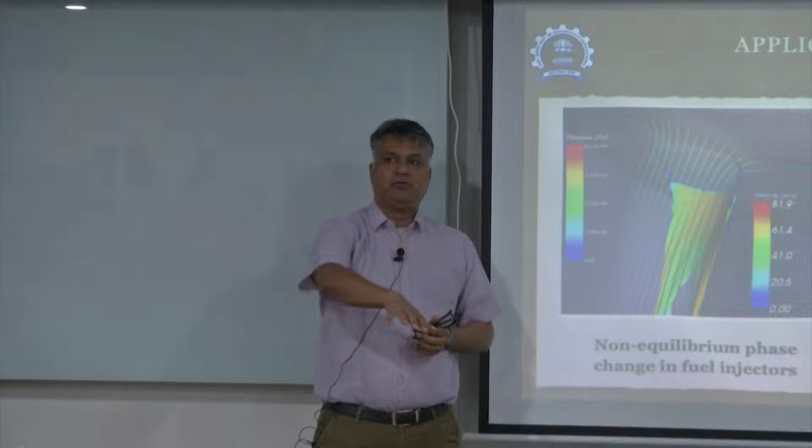The second thing is, how do we model this fuel injection process? Because the pressures are going so low, you're going to start seeing vaporization within the fuel injector itself. Typically in normal fuel injectors, you have full liquid fuel and vaporization takes place only inside the combustion chamber. But now, because the back pressure is so low, you'll probably see vaporization within the nozzle itself. So how do you design this nozzle? How do I understand the physics of it? And to add to the challenge, this is not a single species liquid. Petrol contains several components.

It has octane, it has lighter fractions, heavier fractions. It's generally a mix of many things, so it's essentially a multi-component hydrocarbon.

Then the second problem is, how long does this injection take place? A typical car, if idling, runs at about 800 RPM. If driving regularly with normal load, not climbing a hill, it's about 1200 to 1500 RPM, depending on how the engine is configured. Your injection time is a small fraction of that cycle. 1500 RPM typically means a 4-stroke cycle, so divide by 2, and you can figure out how much time one full cycle takes. Injection is a small fraction of that—really small, just a few milliseconds, or almost a few tens of microseconds, where the injection actually takes place.

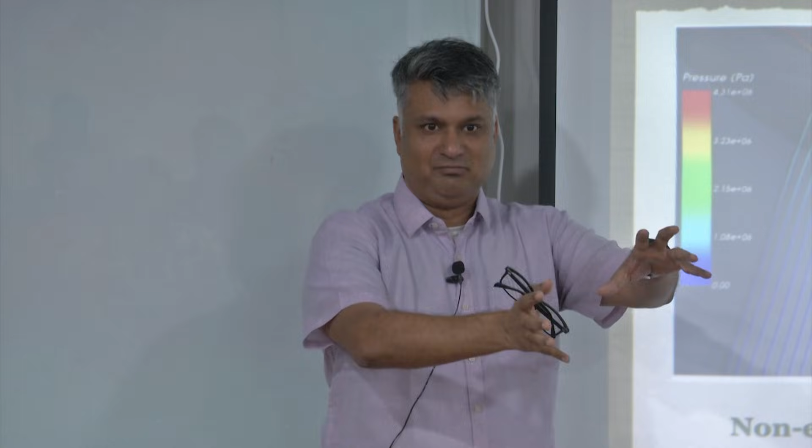In that time, as the fuel vaporizes, what we think as engineers is that the moment a thermodynamic state is reached—pressure, temperature, all other properties—will reach there immediately. But that's equilibrium thermodynamics. In that short period of time, there's no equilibrium. So there's some finite lag for which this needs to come in, and now you have to model the phase change with thermodynamic non-equilibrium.

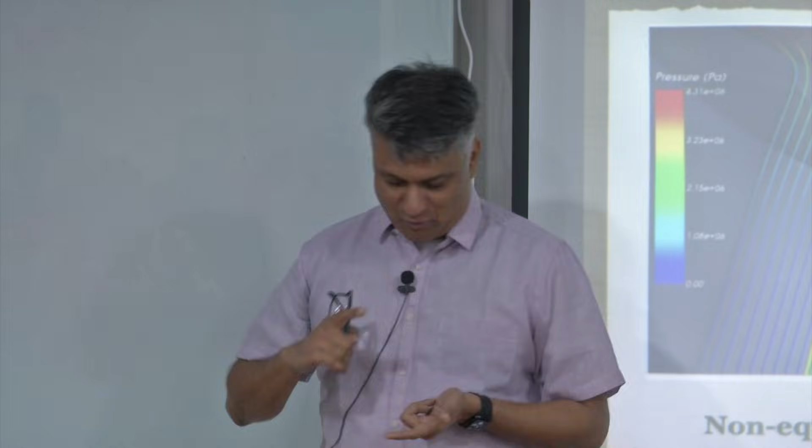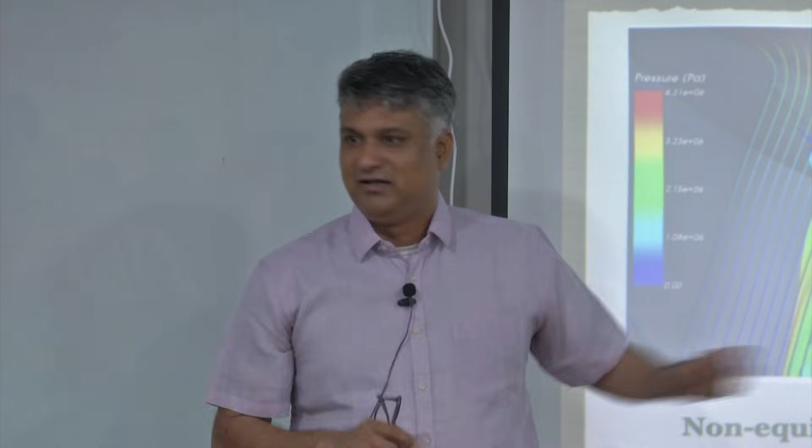Now think about the complexity of the physics in it. I have to model multiple species or a surrogate fuel, model the non-equilibrium, and then take care of real world injector geometries. I can't just do this in a straight tube and say the problem is done—this is the real world. This, by the way, is an actual fuel injector from Bosch, which goes into an operational GM engine.

So think about the complexity of the problem, and you don't have 15 years to develop this. If I had taken 15 years to write code from scratch to model this, by then EVs would have come and this would be gone in history. You have to do this cycle.

What really helped us is OpenFOAM. OpenFOAM was in its early days—in fact it was called FOAM till 2004, when they open sourced it. There was a small community, primarily out of Imperial College: Henry Weller, Hrvoje Jasak, and others. Then Hrvoje got a faculty position at Zagreb and moved there, working with a few people. We were among the few, I was a student in the United States at that time, who started working with them. We decided to try this modular approach, to see if we could develop something quickly enough and test it for real world engineering problems.

I was fortunate, things worked. With research, nothing is guaranteed, but things worked. We were able to develop this quickly enough, and within a period of about 3.5 to 4 years, we actually gave a validated code for engineering calculations to General Motors.

So much so that in their production cars from 2008 onwards, they used this model to simulate fuel injectors, designing GDI type engines. Similarly, the same model was used to model non-equilibrium flows for jet fuel, Jet A and JP8, used for Pratt & Whitney's engines by United Technologies. The modularity of this code really helped us accelerate a lot of complex industrial calculations we needed to do.

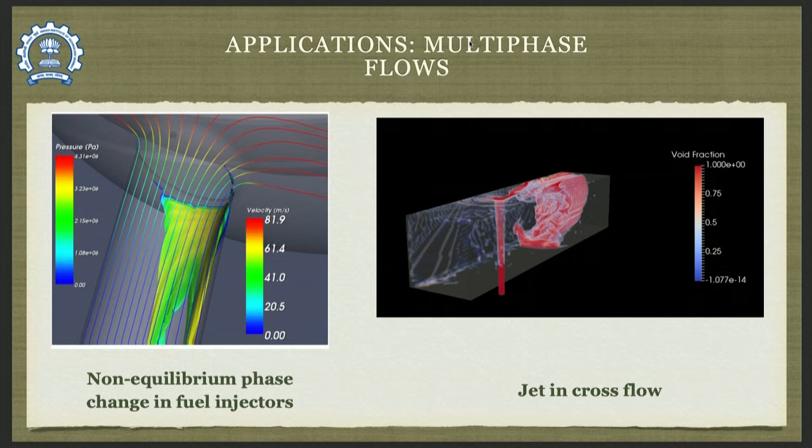And that's the story I'm going to tell you today—what sort of different problems we've attacked in the last couple of decades. I can't talk about all of it because some is under IP and I can't discuss it openly. Some is ongoing. Some were failures too—I'm not saying everything is hunky dory, you can't have everything succeed all the time.

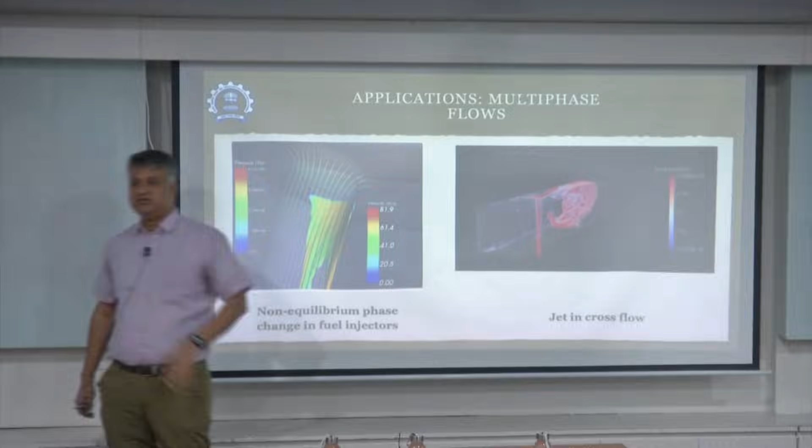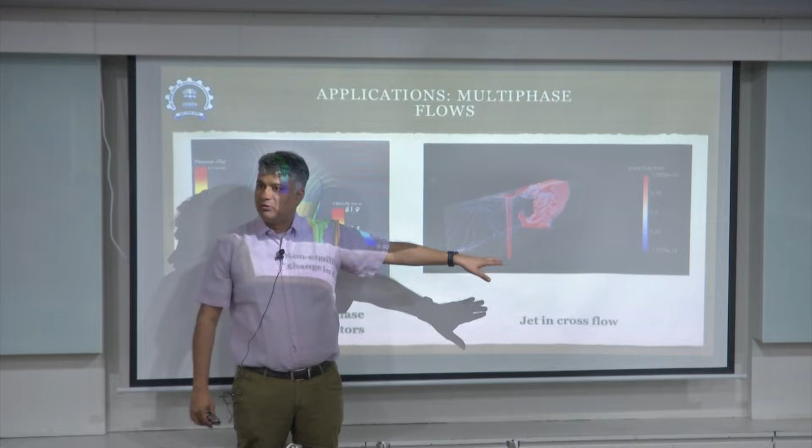So this was one of the first problems we worked on. Then as I got to IIT Bombay, we started looking at fundamentals of jets and cross flows. This was important for us, looking at the fundamental dynamics of how jets break up in cross flow—a complete multi-phase flow problem with RANS type closures for turbulence. We wanted to study the breakup characteristics of this jet, driven by an industry problem looking at land-based gas turbines and fuel injection in them.

So you're injecting liquid fuel into the combustors of gas turbines. There was a cross flow, and it would break up. We wanted to see how these breakup modes would occur, again to look at fundamental breakup characteristics, then mixing efficiency, and so forth. This is a similar problem to the jet and cross flow problem, where we used a volume of fluid approach, not explicitly tracking each and every phase.

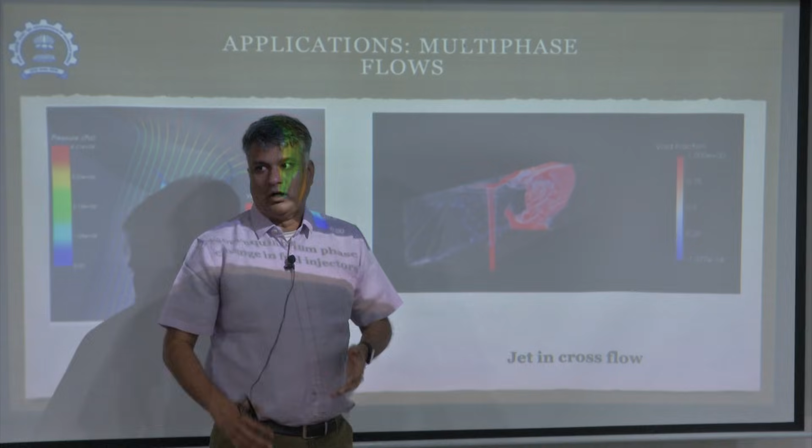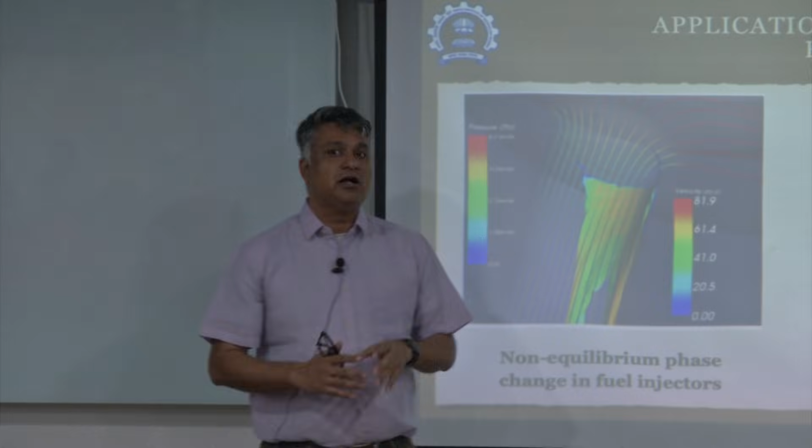Because we were using a volume of fluid approach, we had to resolve a lot of features, and that meant it was computationally very, very expensive for us. So we could only do basic fundamental studies with it and then come up with better correlations in terms of atomization models and breakup models.

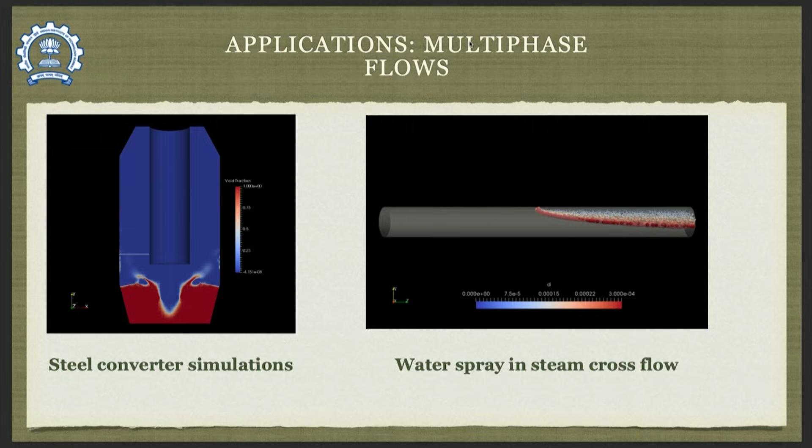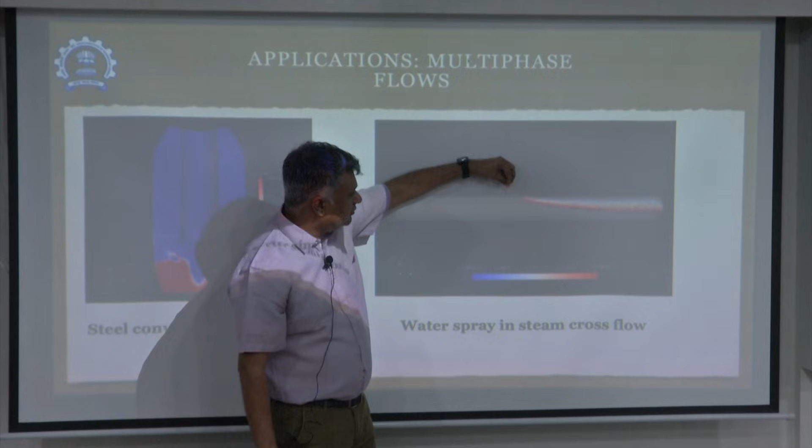The next problem where this helped us was this one. This is basically a Lagrangian-Eulerian type of problem where you have injection of water into a cross flow of superheated steam. The water breaks up into many small droplets and then eventually vaporizes.

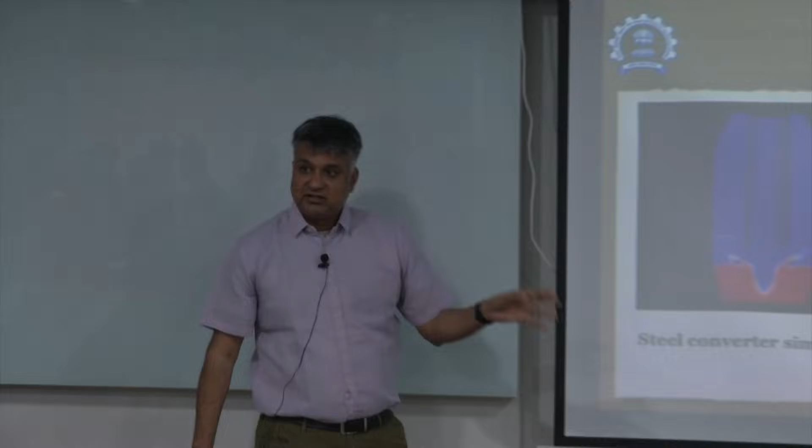Now you will ask, what is the purpose of this? This is used as a control mechanism in thermal power plants. The idea of thermal power plants is that you generate a lot of heat, which is used to produce large amounts of steam. The steam goes and drives a turbine, producing power. But when the superheated steam is produced, one needs to modulate and control its temperature.

The combustion process generates steam at extremely high temperatures. But when the steam actually goes through the system and hits the turbine, you need some sort of control on what temperature the steam is hitting the turbine at. Because if it hits at extremely high temperatures, you will have material destruction of the turbine blades, which are very expensive.

So how do you control high temperature steam? How do I modulate the temperature? The way is that I inject water. Basic thermodynamics kicks in, the first law kicks in. The water vaporizes, takes away energy from the steam, and then you have this delicate balance.

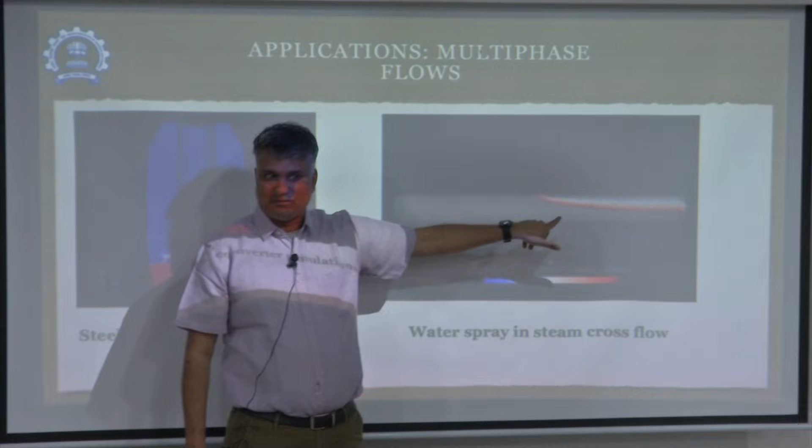But here's the challenge again. I need to understand how the breakup of this water takes place, the atomization of this water takes place, how it vaporizes, and how much the temperature drop is.

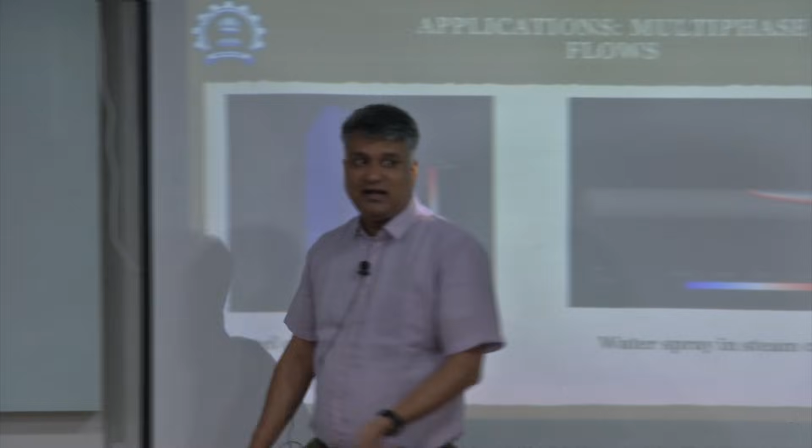And is there any residual water left? Because imagine if I under-inject water, I am not going to cool the steam to the desired temperature. If I over-inject water, I not only waste energy by overcooling the steam, but there is a strong possibility that not all of the water will vaporize.

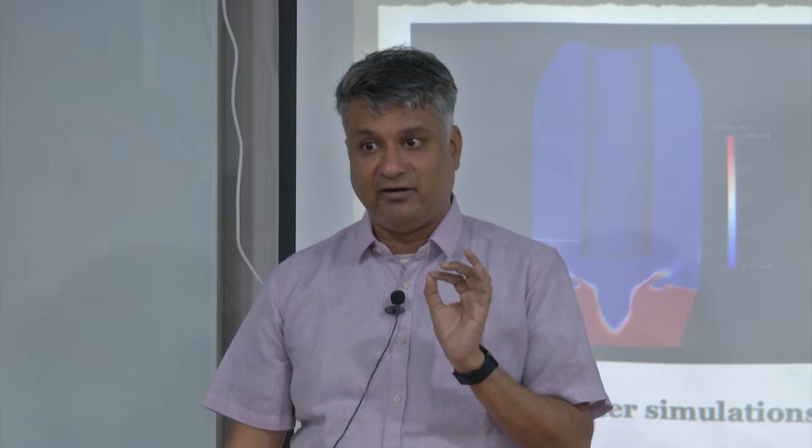You literally have a bullet, because water is almost 1,000 times more dense than steam, and it's going to hit the turbine blade with that much momentum. So you're going to cause further damage. You have to understand this entire process and model it, and this is not easy.

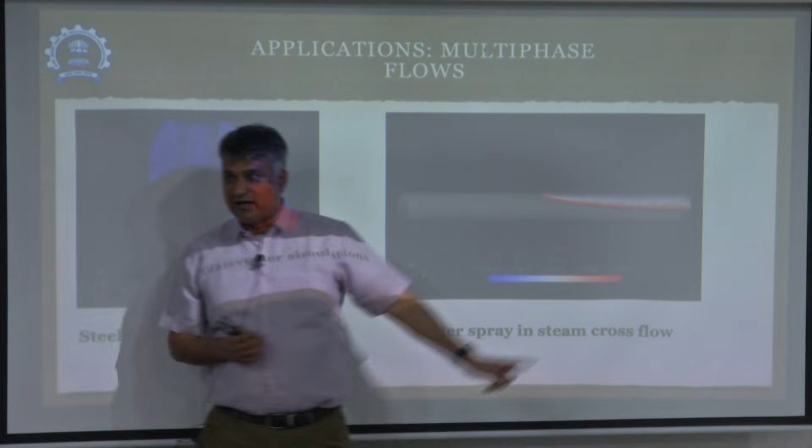Remember, the size of this pipe is about a meter. You go to a large 500, 600 megawatt steam power plant, this pipe is about a meter in diameter, and your droplets are micron size. I cannot fundamentally resolve each and every droplet.

Computationally, forget the supercomputer sitting here, you give me the world's fastest supercomputer, yet it's not a tractable problem. And it's not worthwhile throwing that much energy into the problem, because the energy being produced by the steam power plant is probably not enough to pay for that computation. So how do you solve it?

You solve it using arbitrary Lagrangian Eulerian. You model these droplets as Lagrangian particles, Lagrangian parcels in the cross flow, and put in correlations. I won't go into the math here, but if you want to talk about the math, you can come — there's an entire paper, an entire report about it.

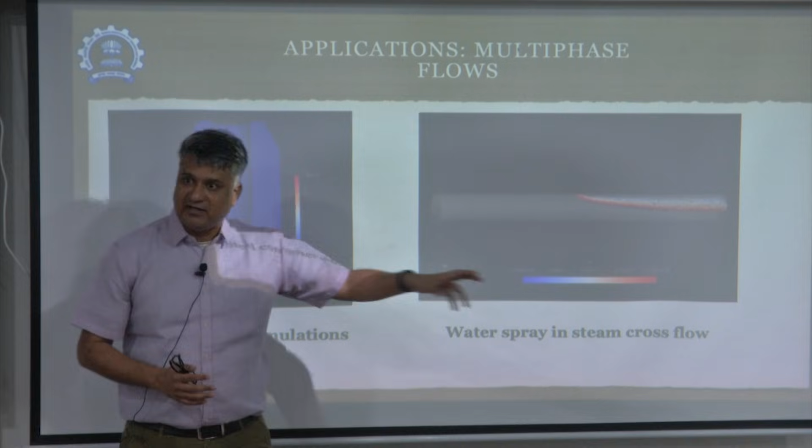But again, we were able to do these calculations within a year. We were able to suggest to the company producing the steam power control valves: here is the prediction from CFD. We validated it against experiments, did some fine tuning, and then said, okay, here are the atomizer design changes you can make to make this mixing more efficient.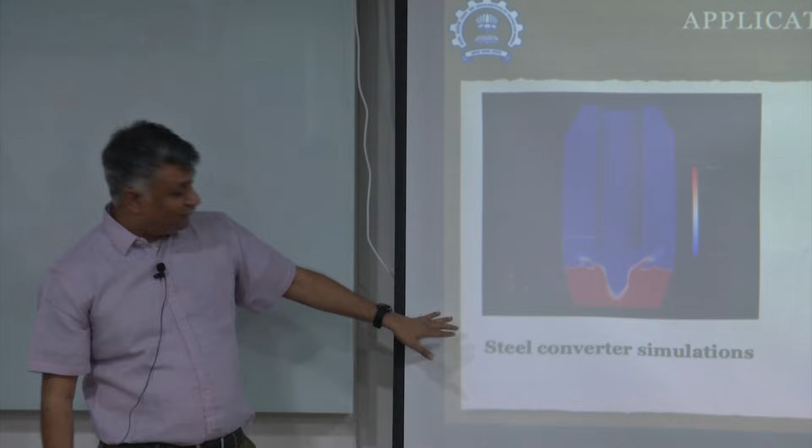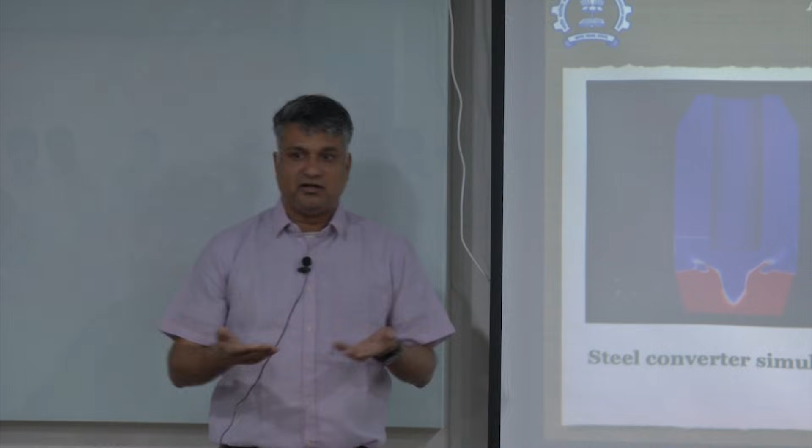This is steel converter simulations, done for a Japanese steel company. A steel converter is basically where you have molten steel and you're hitting it with extremely high velocity compressible air jets. The reason is that you want to agitate the molten steel so that all the slag and impurities come up to the surface and you can take it off.

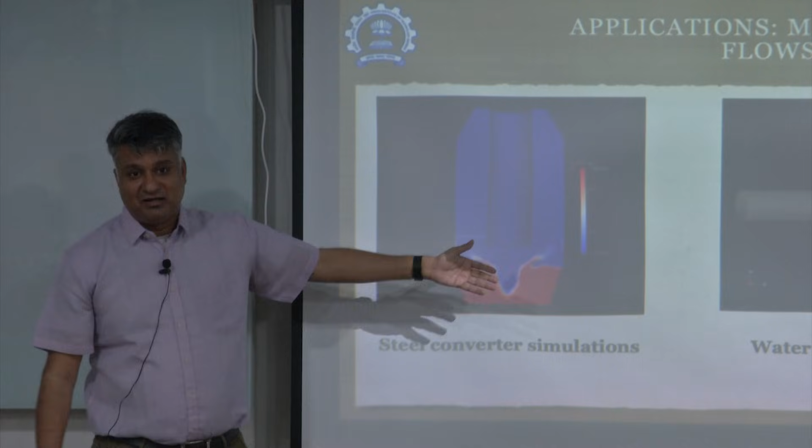Challenge here: molten steel has a 7,000 to 1 density ratio with the compressible air — air is about 1 kg per meter cubed, steel is about 7,000 kg per meter cubed. You have to model this sloshing steel accurately, and figure out how these injectors can be placed optimally so that you have reasonable sloshing, reasonable mixing, and reasonable slag extraction.

Magnetohydrodynamics — this is the test blanket module for the ITER fusion reactor, and you can see the scale of the human being here.

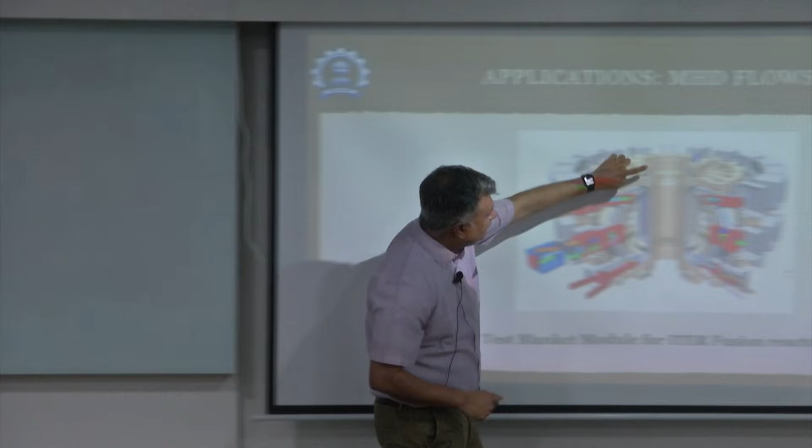So there's a breeder section here. One of the things the fusion reactor needs as fuel is deuterium and tritium. Tritium is not plentifully available. Deuterium and tritium need to be created through a process called TBM, or test blanket module. So what is a test blanket module?

It basically has flowing lead lithium alloy. Lead, one of the heaviest metals known to mankind, and lithium, very, very light, mixed together as a eutectic alloy, is flowing through. It's a magnetohydrodynamic fluid. You're basically having a nuclear reaction which is producing tritium, and a byproduct of that is helium. And there's a possibility of helium ingress in that.

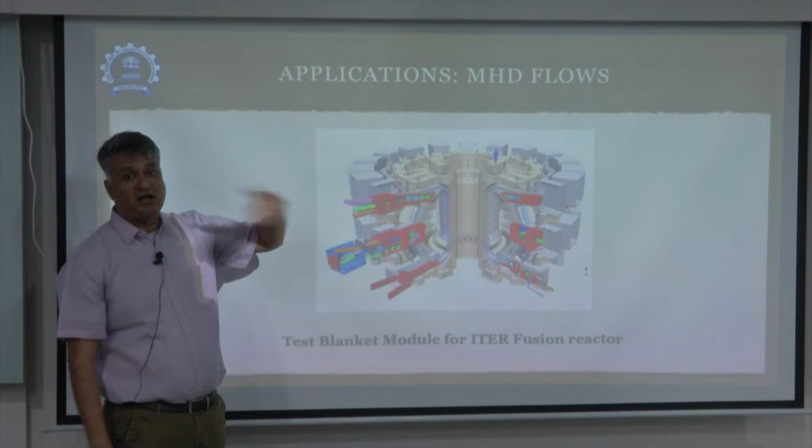So this is being done in a very, very strong magnetic field. We have to model this as a magnetohydrodynamic fluid. So we were trying to understand the physics of the magnetohydrodynamic flow at extremely high Hartmann numbers in this TBM module. Also, again, in OpenFOAM.

Biological flows. So we talked about a lot of industry, now biological flows. When the pandemic hit, there was a lot of CFD being used to study different types of flow dynamics. One doctor came to me and said, can we study the flow characteristics inside the nasal passage? Because one of the mechanisms of the vector was that these pathogens would go through your nasal passage, and some of them would get stuck there, and some would go inside. There are ways to rinse it out, but to understand that process, we had to understand the flow dynamics within this nasal passage.

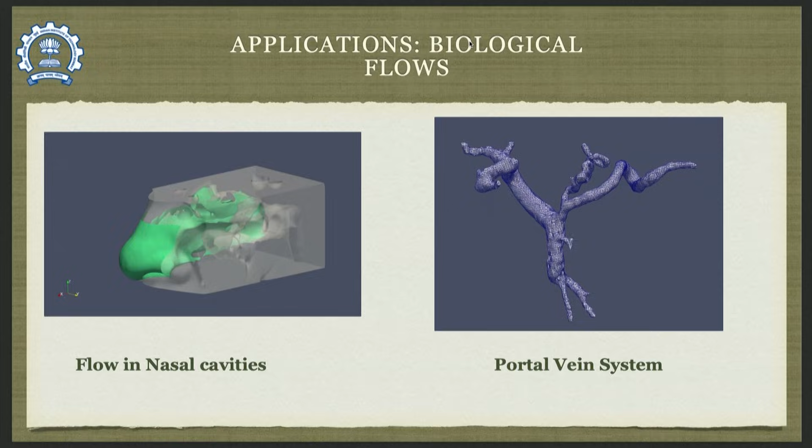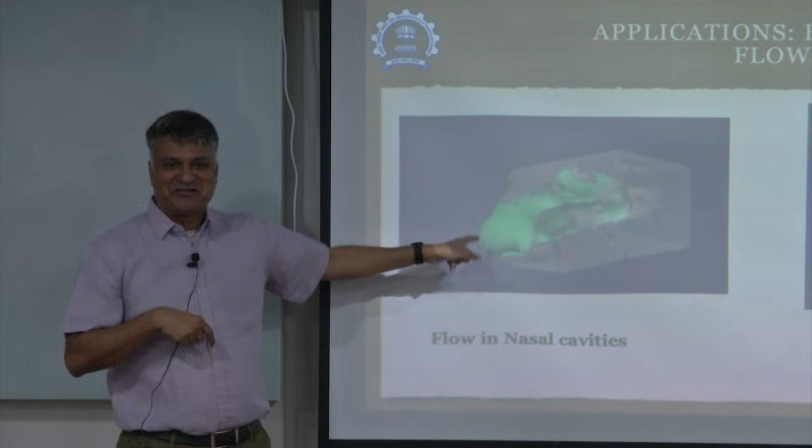So we actually took, if you look very closely, that's my nose. That's actually my nose. I took my MRI, reconstructed the mesh, and put it up there and tried to study the flow dynamics inside it. This project didn't take off too much because the science of rinsing off the pathogens, etc., was not really sound. But the idea was that we wanted to study the fluid mechanics. While it didn't go anywhere, it was a hobby project, but it was fun to do.

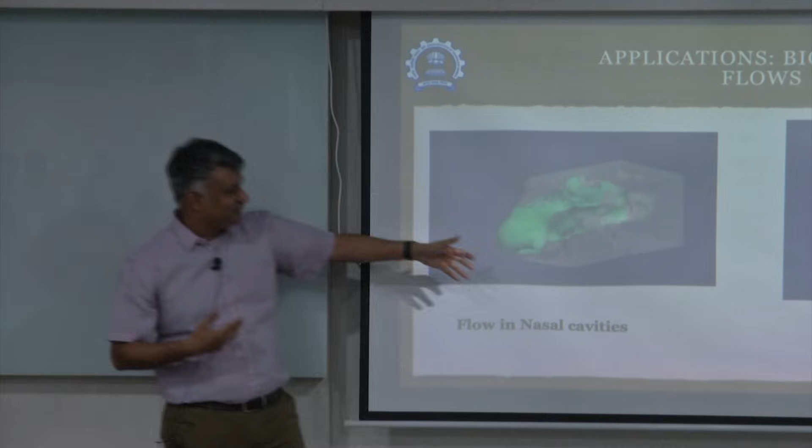The fact was that we were able to take such a complicated geometry. Think about the complicated geometry of the nose, especially my nose, very complicated. We were able to model it all the way up to the back of the esophagus right here. So the green part is the entire cavity, and we were able to model that.

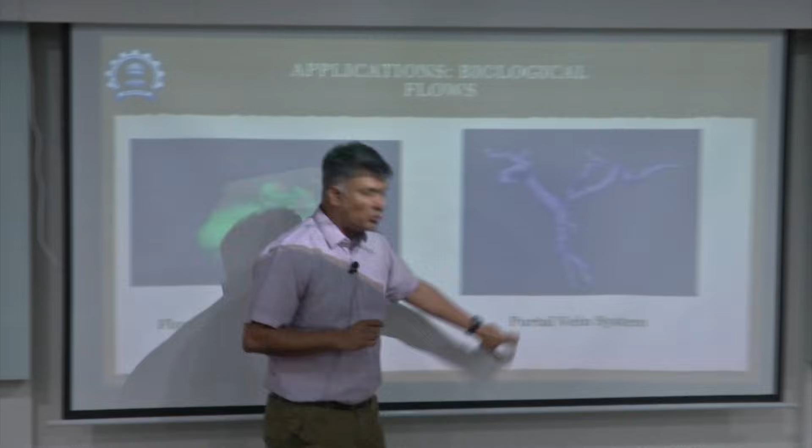This was another interesting project we did with doctors at the KEM hospital in Mumbai. This was trying to look at blood flow, especially in the portal vein system, mostly for patients with liver cirrhosis. Now, the issue with liver cirrhosis is that the portal vein system terminates towards the liver, and there are a bunch of capillaries which then go into the next part of the digestive system.

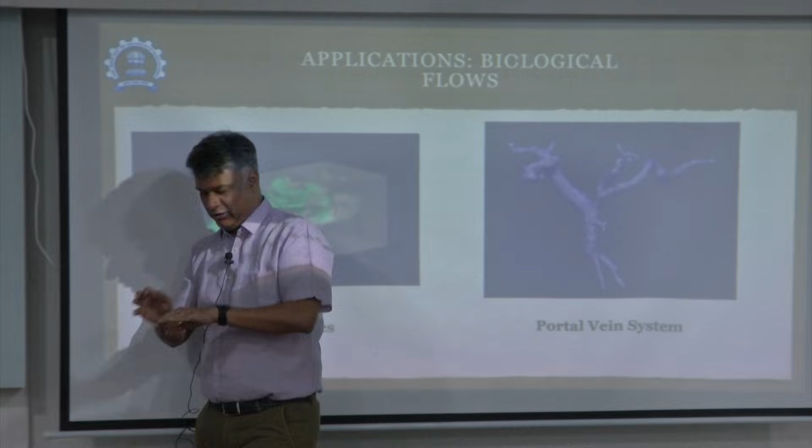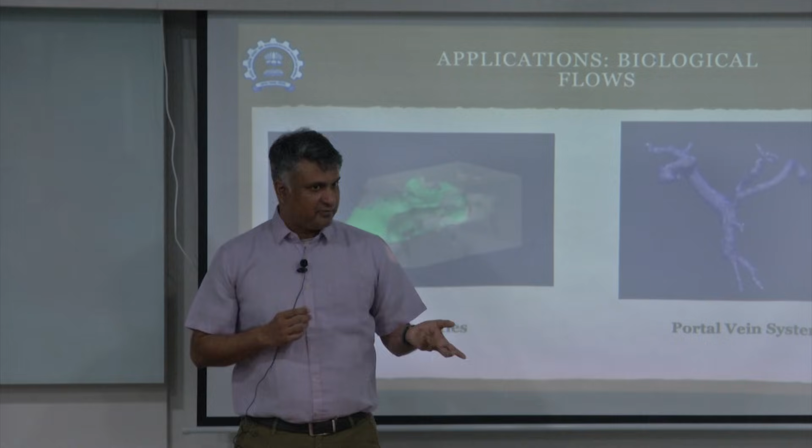Those get completely clogged in patients with cirrhosis. So there are lots and lots of clots, etc. Pressure builds up over here. And once the pressure builds up, some capillaries will burst somewhere, usually in the digestive tract, and the patient bleeds out through the digestive system. That's typically what happens to these patients.

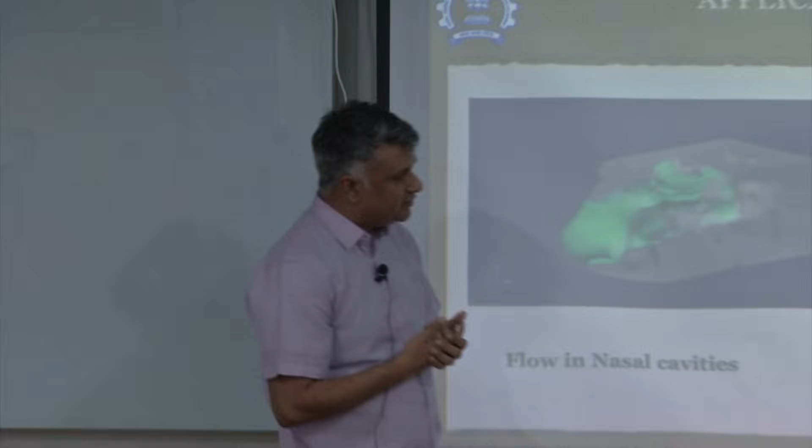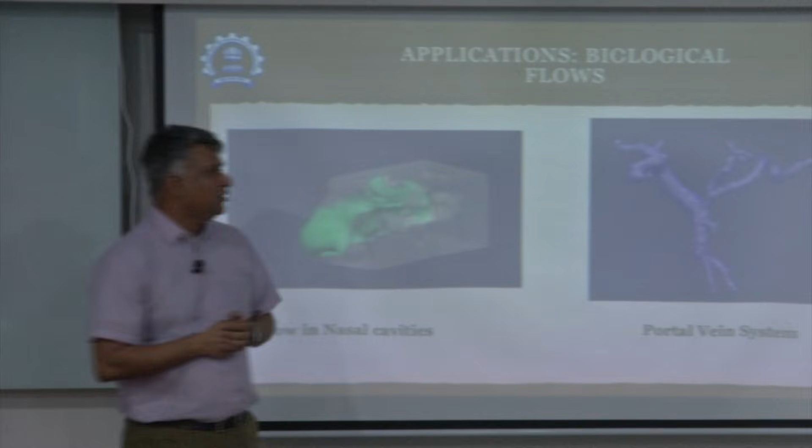So the surgeon had an idea that if I can put a shunt to relieve the pressure, then you might not end up with those capillaries bursting and bleeding out. But where do you put the shunt? How do you put the shunt? For that, you need to understand the flow mechanism in this portal vein system.

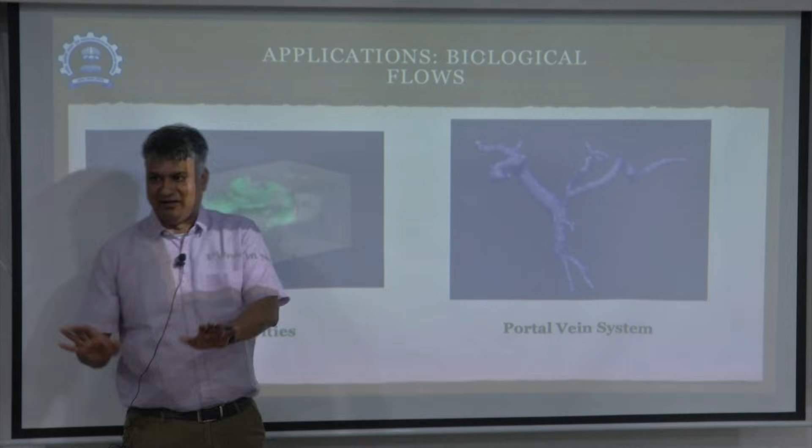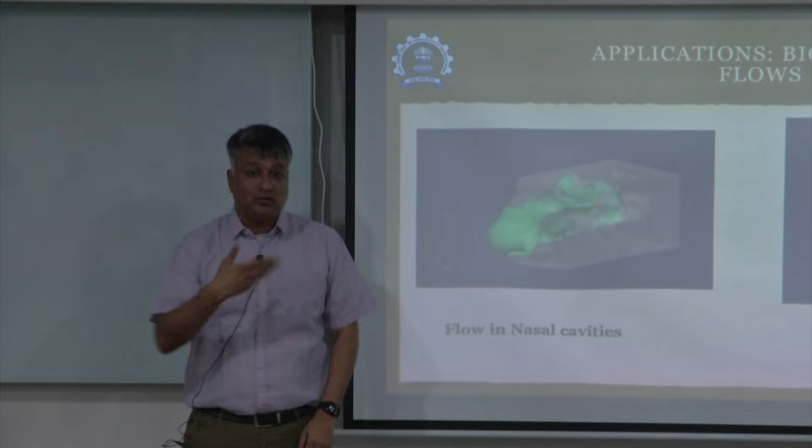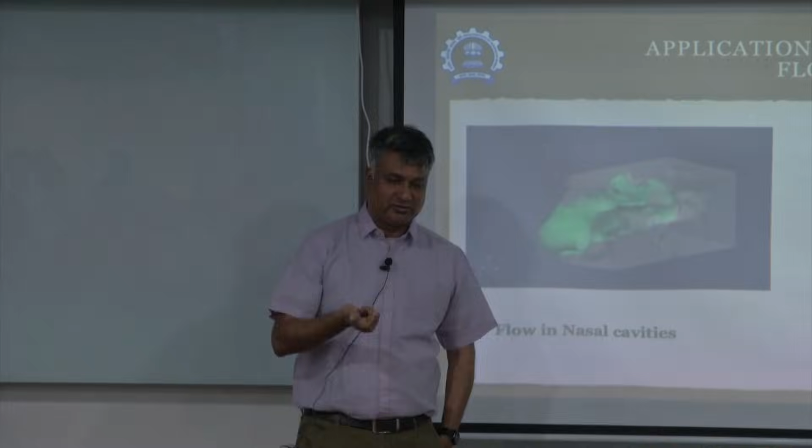This is actually, again, not my portal vein. I have a perfectly healthy liver, thanks to everything. But this is from a patient who was unwell, and we were able to look at the flow dynamics within the portal vein system, and also make an analysis of where the pressure builds up, and that can guide the surgeon on where he or she can put a shunt in the system to relieve the pressure.

So what I want to draw from this talk is that you can see the diverse ways we can apply this technology. CFD can be applied in many places, but the fact that somebody like me, whose forte is just modeling - I'm not a doctor, I don't know anything about the portal vein system, I am not a metallurgist, I don't know anything about molten steel. I'm a mechanical engineer. I do know something about power plants.

I'm not a nuclear scientist. I don't know anything about TBM. But my strength is, I always say, give me a PDE, I will solve it for you numerically, not analytically, numerically. And I can do it very quickly using a toolkit like OpenFOAM.

That's the beauty of it. I can solve extremely complex problems using things at extremely large scales.

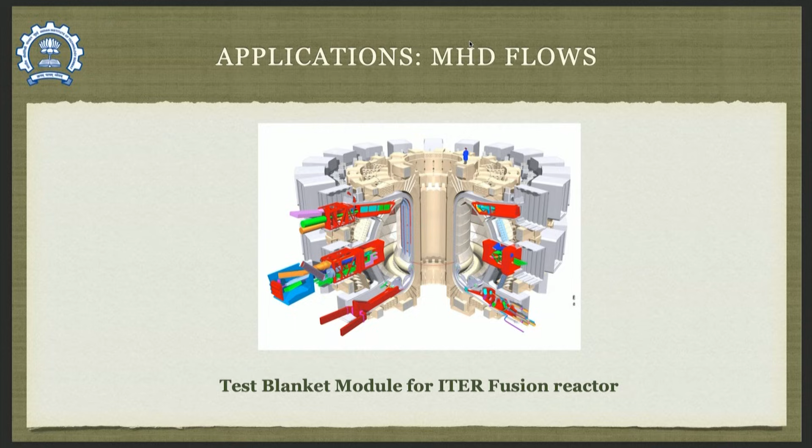Now I'll show you a couple more problems which we have not solved using OpenFOAM, but hopefully someday I will want to solve using OpenFOAM. This was done using some other standalone codes. This is a problem of the 2004 Indian Ocean tsunami.

Looking at the tsunami origin, how the waves spread - I'll show you an animation of this in a bit. And then once the tsunami takes place, this is the coastal inundation. The wave comes and there are some buildings, etc. How does it flood the coast?

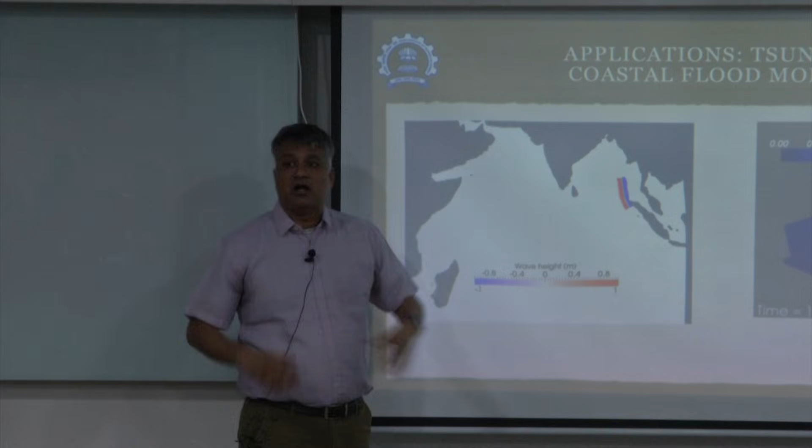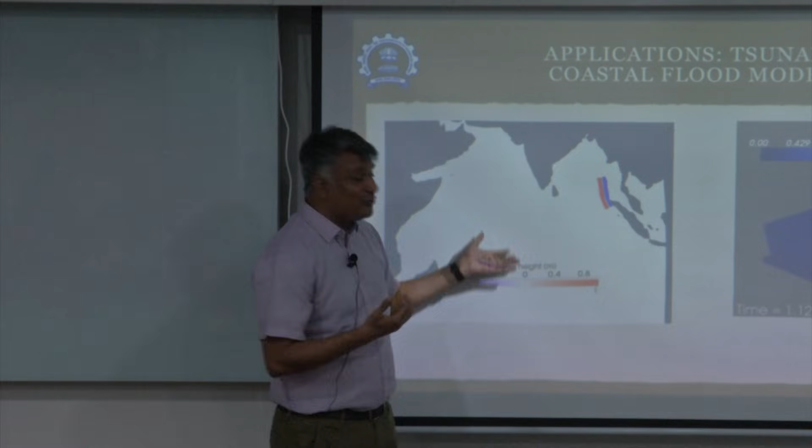These are sort of the same problems, but delinked in certain ways. We are using different techniques and numerical methods to solve this. My hope is that someday these techniques - the other advantage about OpenFOAM, as Professor Bose and Ms. Payal said, is that it's open source. We can keep modifying this code, we can keep adding stuff ourselves. So we would like to add these numerical techniques into a toolkit like this so that you can utilize it.

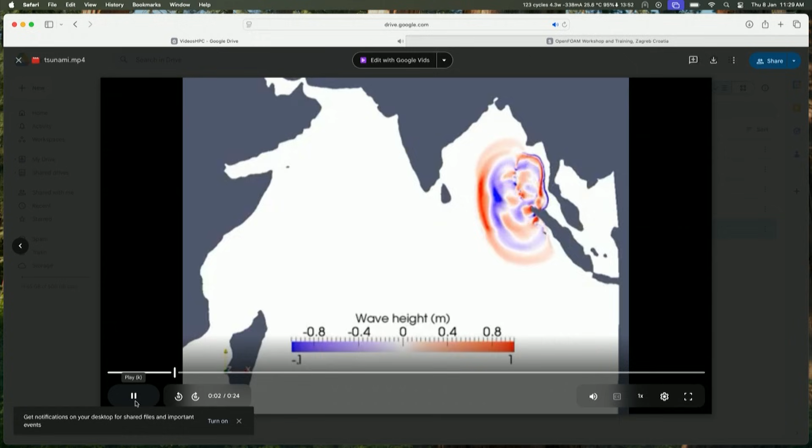Okay, I'll quickly show you some animations before I close the talk. This is the 2004 Indian Ocean tsunami. You can see the wave arriving. You can actually see the wave go all the way to Africa.

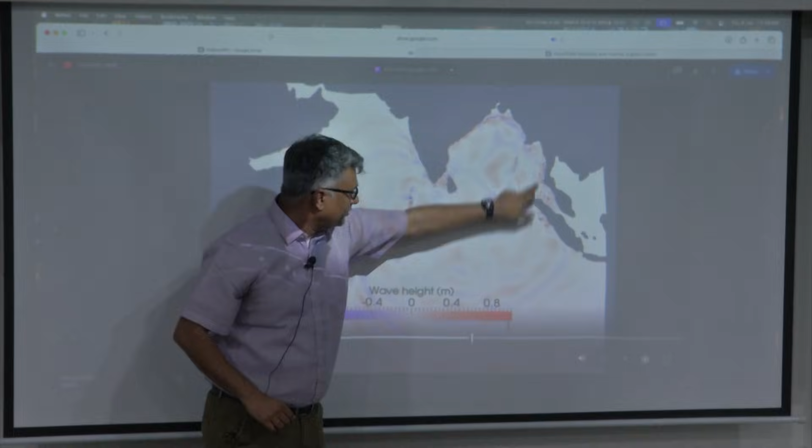People measured the tsunami all the way in Africa. While the majority of the damage was in Sri Lanka, eastern coast of India, Thailand and Indonesia, the measurements happened all the way there. In fact, they even measured the tsunami wave in Goa, which is on the western coast of India.

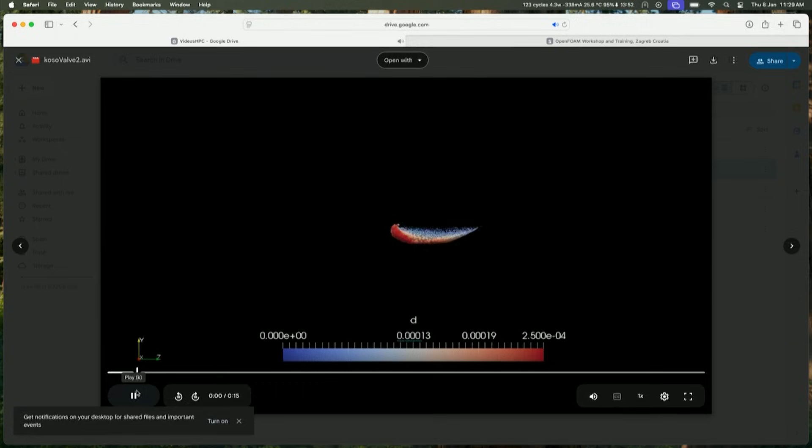I'd like to also show you the injection of water in this steam control valve. By the way, all this is validated stuff, okay? So it's not just carefully fudged data or CFD.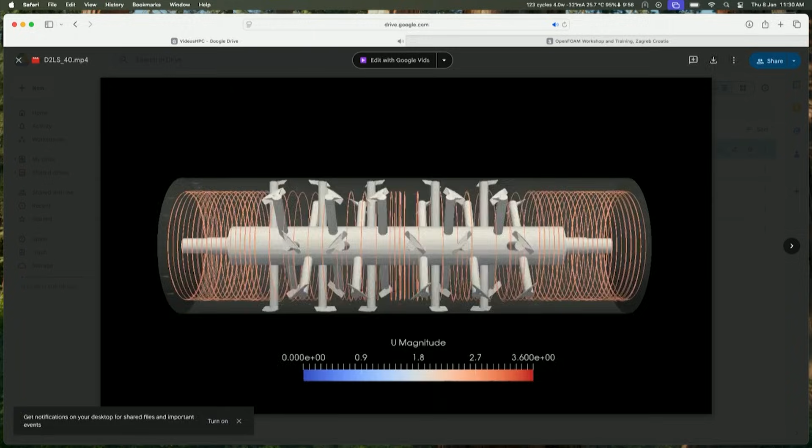This was another interesting project of an agitator in a food processing plant. There was this agro industry company that came with different ingredients which would go into this large agitator and they had to mix it. They wanted to optimize the agitator arms, where to place them.

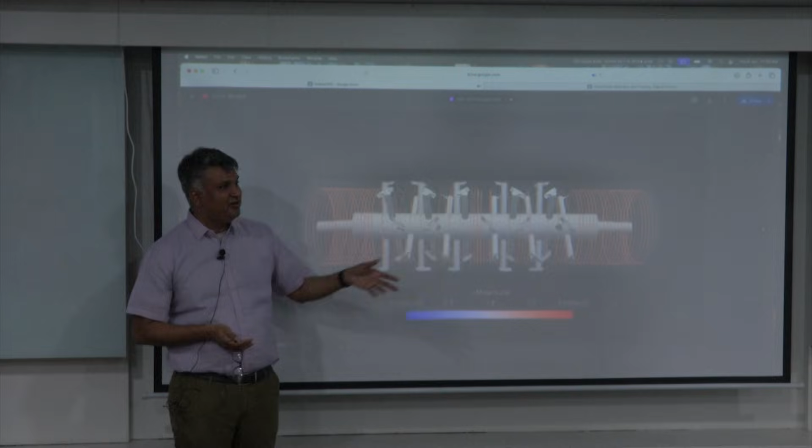So that you could mix it most efficiently with the least amount of energy. So this was a problem, and it exploited everything - AMR, moving reference frame, so on and so forth.

And lastly, I would like to show you this steel simulation. You can see the sloshing of the steel happening here, the liquid steel. That's the steel-air interface.

So what are we doing now further with OpenFOAM? The current projects that we're working on include modeling ALD, atomic layer deposition. This is mainly for semiconductor manufacturing of semiconductor chips.

The other thing we are looking at is modeling electrolysis for alkaline electrolyzers. This is with the hydrogen economy - energy is being generated either through green sources like wind and solar, or even gray through thermal and hydro plants. But if you want to transform it to the hydrogen economy, you have to generate hydrogen, done through the process of electrolysis. So we are looking at trying to optimize the shape of electrodes using CFD simulation.